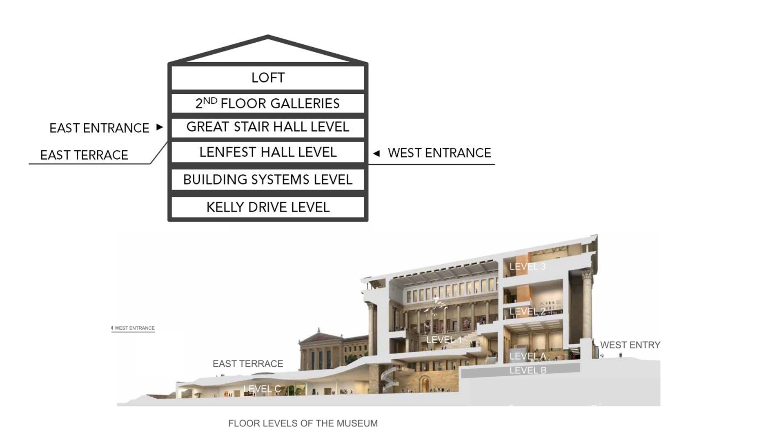First, you should note that the building is built not only on top of the hill, but also into it, with the lowest floor being at the base of the hill or street level. As you can see, there are three levels here, here, and here, including 2 floors of galleries above the level of the East Terrace. And then there are 3 below, so 6 floors altogether.

The pavilion at the center of the museum, of which you see a section here, also contains our principal public interiors and vertical circulation paths: the Great Stair Hall, which rises 3 stories from bottom to top; Lenfest Hall here on the west; 2 entrances, one on the east and one on the west; and formal staircases here leading up from this space to the Great Stair Hall.

Now, one of the principal objectives of our facilities master plan is to extend public circulation down to the lowest level of the museum and to create a pathway to the new galleries that will eventually be built underneath the East Terrace, and I'll speak about those in a few minutes.

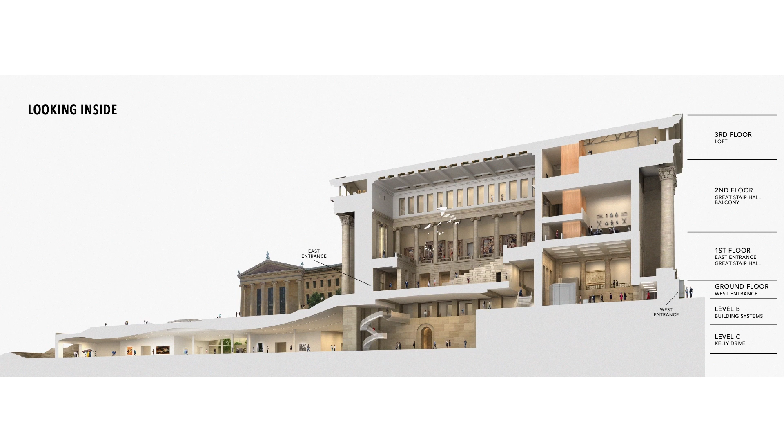As you will see in a moment, it is an enabling project in the sense that it accomplished a number of things that were essentially prerequisites for future phases of our master plan. These include replacing and expanding the capacity of our building systems—electrical, air circulation, life safety, and so on—reorganizing public circulation at the center of the building, and getting a start on expanding our gallery space.

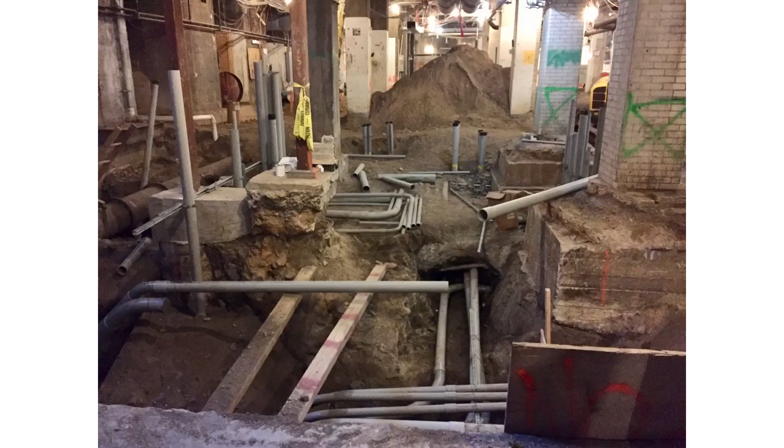Now, to return to the core project, much of its cost was in infrastructure, in replacing old and inefficient air handlers, electrical switchgear, and fire and life safety systems. Here you see the level which houses our equipment rooms being demolished about 4 years ago.

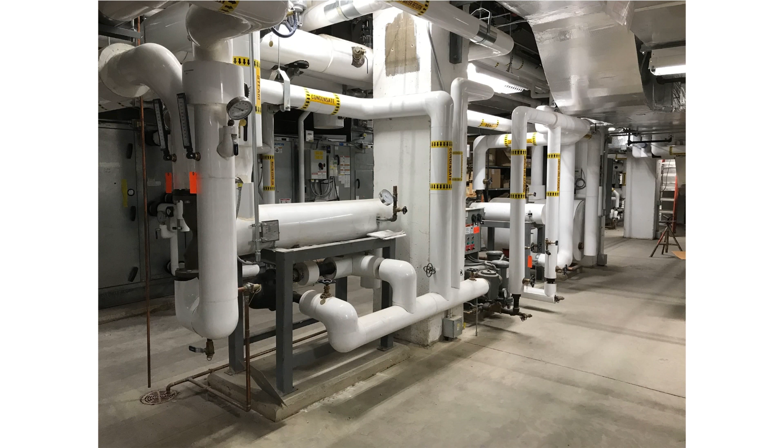The architects in the room will understand one of the challenges we faced in working on the core project, because we didn't have a set of as-built drawings for the building. Thus, we encountered many surprises along the way, such as irregular foundations under columns and uneven foundations or bedrock below. And here you can see the same space renovated and installed with new and more energy efficient equipment.

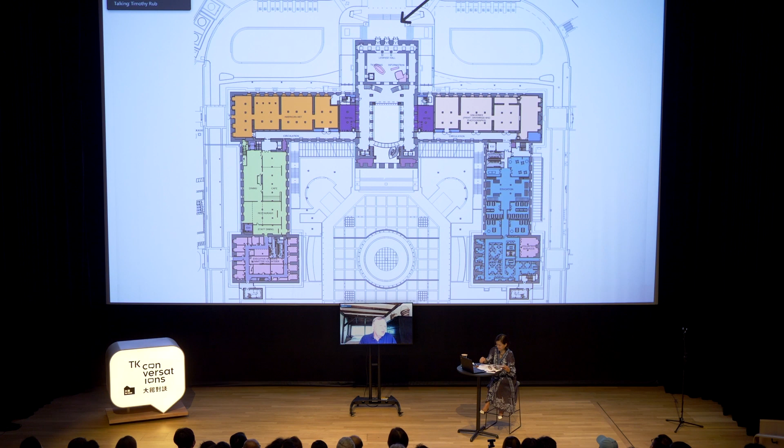Now, perhaps the most complex set of challenges that we faced with this project were in section 4, the museum's central pavilion right here. This was closed for nearly 2 years to accommodate a significant amount of work, some of it transformational, some of it focused on renewal and preservation.

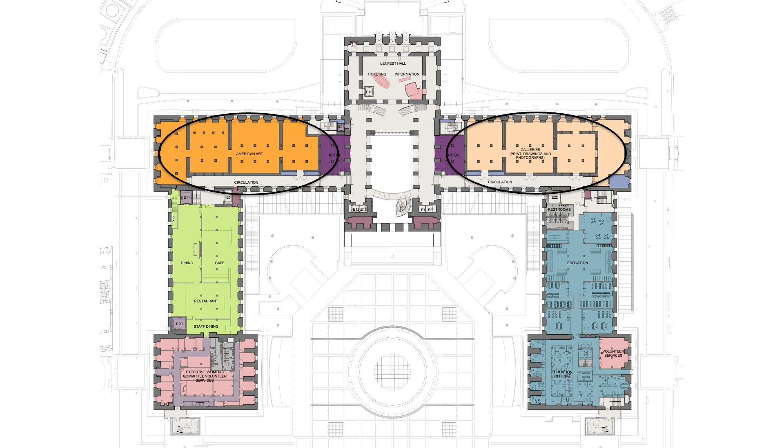The West Entrance, where you see the arrow, one of the principal entrances to the museum, had in essence to be rebuilt. This is the first of a group of before-and-after animations I'm going to show you.

This involved removing the central desk designed by Robert Venturi several decades ago to open the room up, cleaning the stone walls and columns, replacing the old coffered ceiling with a new one with integrated LED lighting, which you can see at the top of this image, and opening the space containing the staircases that led up to the Great Stair Hall.

Beyond Lenfest Hall, this space, we get to the very heart of the project. This area, circled on the screen here, provides access to the upper floors of the museum as well as to the north and south wings. It was also needed for vertical circulation to provide access to the ground level of the museum, and, as you will see, to the future galleries underneath the East Terrace.

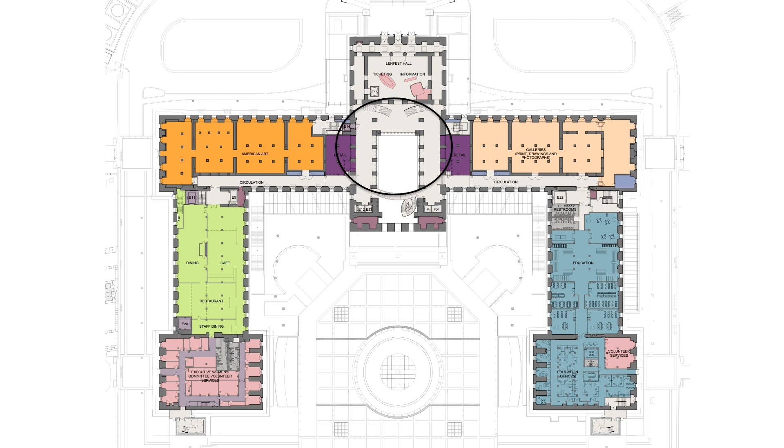In this animation, Lenfest Hall, the great entrance hall to the west, is at the far end of the image, and the two arches in the foreground lead into the vaulted walkway, a space on the ground floor that I will show you in a few moments.

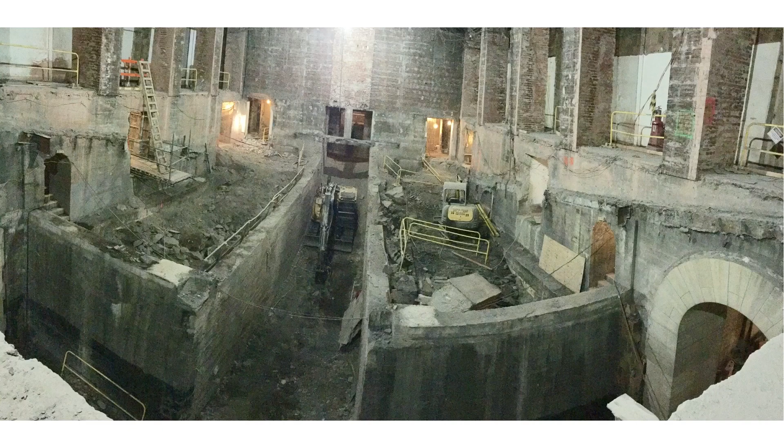Now, this wasn't easy to do, removing the auditorium and opening the space up. Here you see the demolition of the auditorium in process. It was difficult enough to start with, but made even more difficult because it took place right at the center of the building while it still remained open to the public.

And here you see it before: the old stairs, a wall that visitors encountered and had to walk around, behind which is the auditorium. And here's how this space looks today.

Here's a view into the forum at the balcony level, with its ceiling that curves subtly in two different directions, and several views of the staircase, which you saw at the outset of my talk, located in the final design at the west end of this space, so that it is close to the staircases leading up to the Great Stair Hall. Here the stairs are seen from the east.

This opens up views across the entire breadth of the central section of the museum and provides a sense of clarity and orientation that simply didn't exist before.

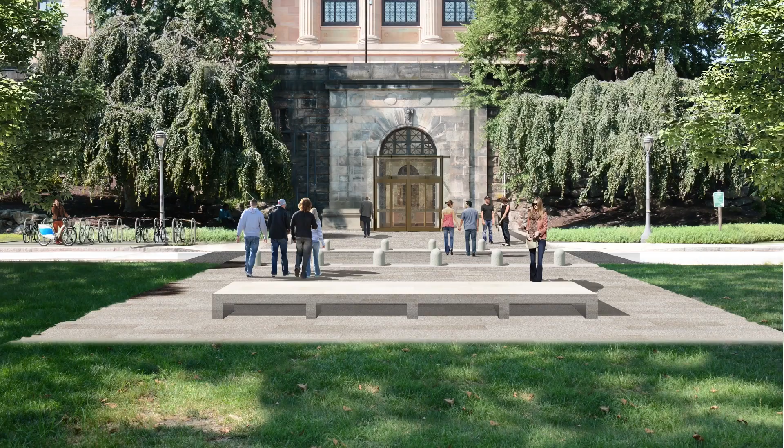And here's a view of this entrance, which was completed in late 2018 and opened to the public then. So a third entrance to the museum.

Now this entrance leads into a large lobby clad in Kasota stone and dominated by four fluted Doric columns. It's hard to imagine that this was once, at the same time, both a loading dock and a public entrance, but so it was. Today it has been restored as a public entrance.

The arch on the left, so the vaulted walkway, is here. It's one of the great curiosities of the museum. Here's the north entrance, leading right into this vaulted walkway, one of the great curiosities of the museum.

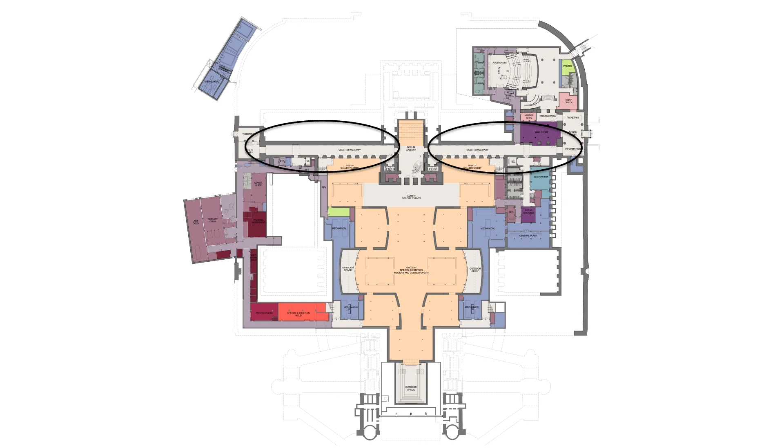It's now bisected by the forum here, as you can see on this plan. But it is, from beginning to end, 640 feet long, stretching the entire width of the museum from north to south. So here's, again, that before and after animation, showing how it has been renovated and restored as a public space.

So why renovate this space and make it accessible once again to the public? With its twin arcades, one of which you see here, of 8 arches each, the vaulted walkway will serve as an elegant and impressive threshold into these new galleries, here rendered just beyond the arches.

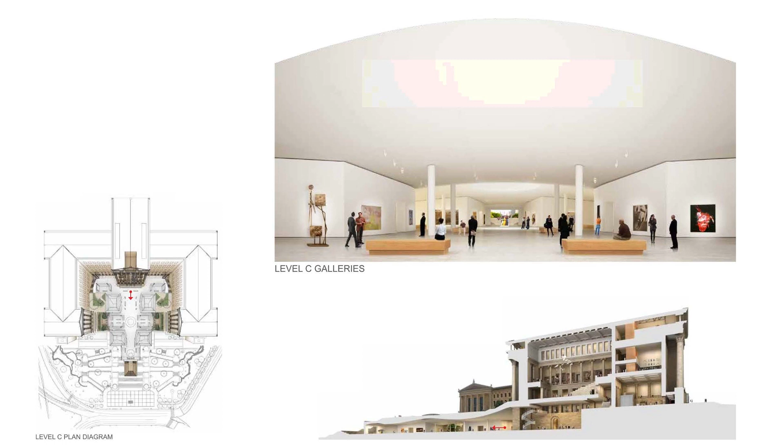The master plan will increase our gallery space by nearly 50%, and this without building an addition on the exterior. On this plan, you can see clearly how the forum and the vaulted walkway will serve as a threshold to these new galleries, devoted to contemporary art and special exhibitions. This is the one space in the museum that stands outside of its historical footprint, where the sense of scale and architectural expression can be different and completely of the 21st century.

These will be the tallest galleries in the museum, ranging in height between 24 and 28 feet. They will also be the most open and monumental in scale, unified by a distinctive shape of the ceiling, which you can see here is a saddleback arch.

And they will be the most light-filled, starting with the oculus in the fountain at the center of the East Terrace and continuing with light from the sunken gardens at each end of the cross axis, with skylights just beyond the vaulted walkway in each of the 4 main galleries.

And if we wish, and can persuade city officials of the wisdom of such a step, we can even put a window in the steps at the end of the central axis, opening up a view down the Benjamin Franklin Parkway here, with the tower of Philadelphia City Hall in the distance.

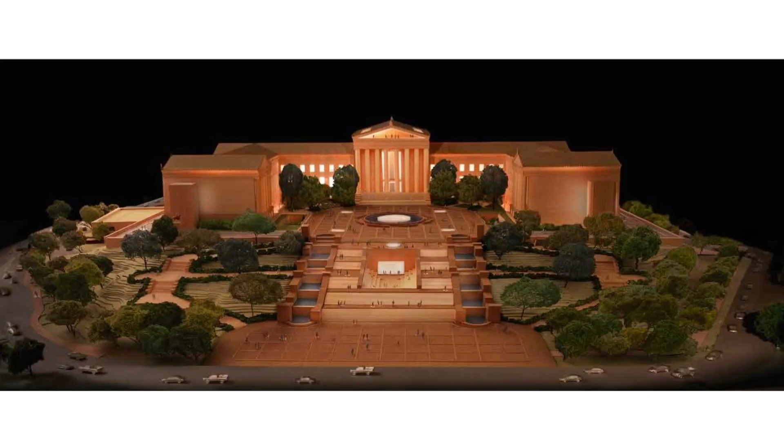Now, this has been a controversial suggestion because it would alter, here you see them in a model, the so-called Rocky Steps, one of the city's most popular tourist destinations. In any event, it's a decision that will not have to be made for some time yet.

Maybe I should explain a bit because I see there are some very young people in the audience. The stone steps leading to the east entrance of the Philadelphia Museum of Art have been known as the Rocky Steps because of a scene in the film Rocky, played by Sylvester Stallone. It was a film released in the 70s. And I found that this is a very interesting intervention at the Rocky Steps.

I mean, as you say, you probably need to seek government approval. And now we can see the rationale for this proposal because it really increased the space for art. But would you anticipate some opinions against it? Or, for example, when you have to lead a project like that, how do you make important decisions about the balance between past, present, and future for this kind of project? Here, for example, people may have some emotional attachments to the steps. So how do you deal with that kind of situation?

You have to have a strong chin if you're going to lead with it, because if you even propose something like this as an option, somebody is going to object. In point of fact, when we first showed this model in 2013, saying we could have this window or we could not, we could do either option, you can't imagine the comments we got. Some of them very pointed: don't mess with our great steps, you can't do that, it would be iconoclastic. And then we also had a lot of people say, this is really great, make the change. It shows Philadelphia moving forward, and it shows Philadelphia willing to transform itself.